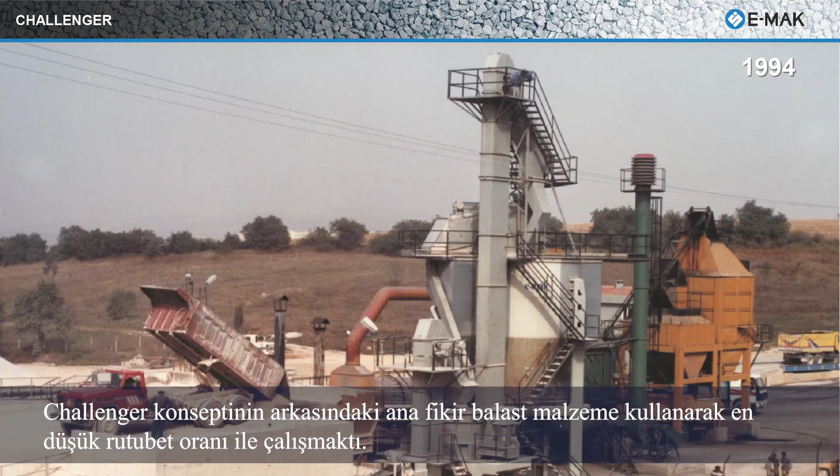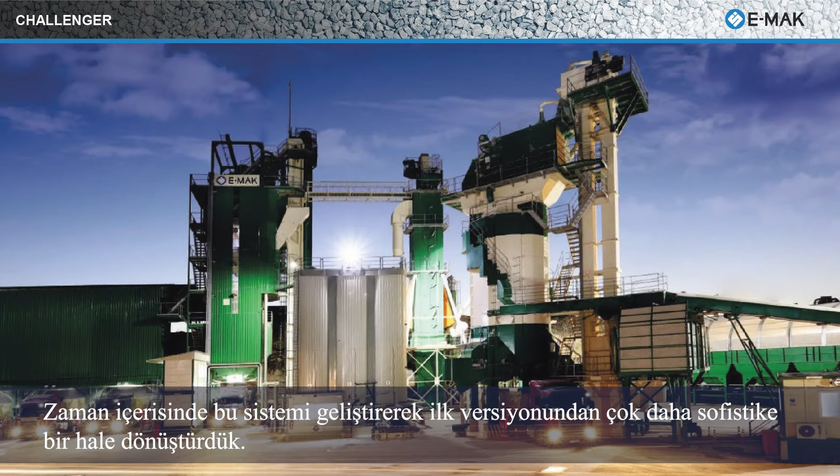I'll give you an example from 1994: a system we called Challenger. The idea was to work with ballast aggregate with very low moisture content, crushing, sieving, stockpiling and feeding the aggregate to the asphalt plant in a totally closed environment. That gave us a great reduction in energy consumption, CO2 emissions, and dust emissions. Over time we developed this system into something much more sophisticated, and it was always integrated into asphalt plants to produce asphalt.

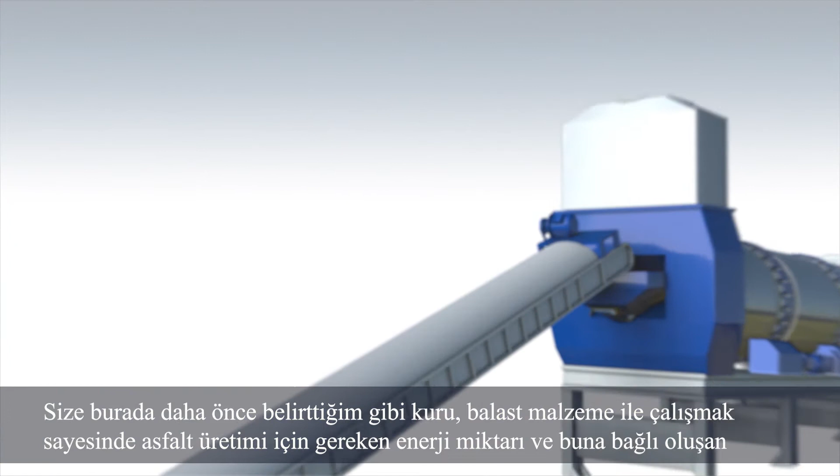I would like to tell you a little bit more about how it works. As I said, the ballast aggregate with lowest moisture is used in our asphalt production, halving the energy consumption, therefore the CO2 emissions. So it was a very successful project for energy reduction. And in 2008, we've been invited to an E&E Congress in Copenhagen, where we made a presentation about Challenger.

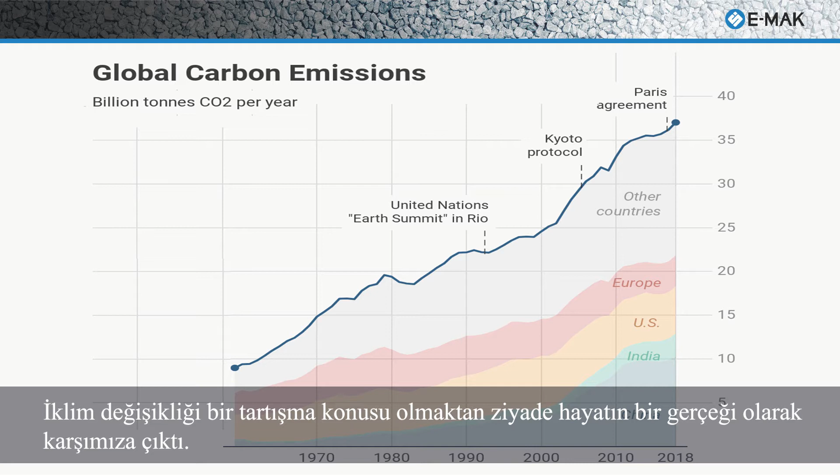Since then, time passed, and in the last 10 years, our lives have changed drastically. The word climate change has become a fact rather than a subject of debate. And the word sustainability has become a must rather than an option or a choice. So we, as equipment producers, we had to focus on doing something about it.

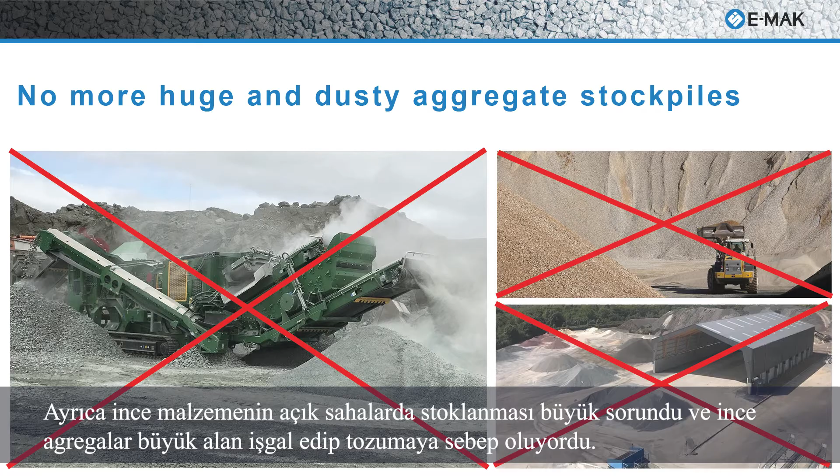So this time we focused our attention to the quarries. We tried to think what we don't want in the quarries. Secondary crushing, after the secondary crushing, the dust that takes place was something that we didn't want. Also, we didn't want to store fine aggregates in our systems. So no more huge and dusty aggregate stockpiles in our work sites. We wanted to eliminate that.

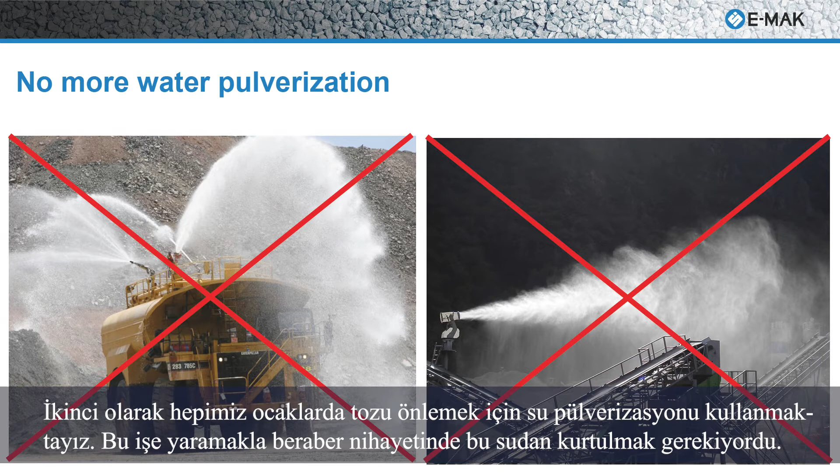And secondly, we all use water pulverization in our quarries, but then we thought, okay, water pulverization may reduce dust emissions for a while, but somebody has to get rid of this water. Let's say we are producing asphalt. This water in it, we have to pay a lot of money, a lot of energy to get rid of it. Then more energy means more CO2 emissions. So we had to get rid of the water pulverization also.

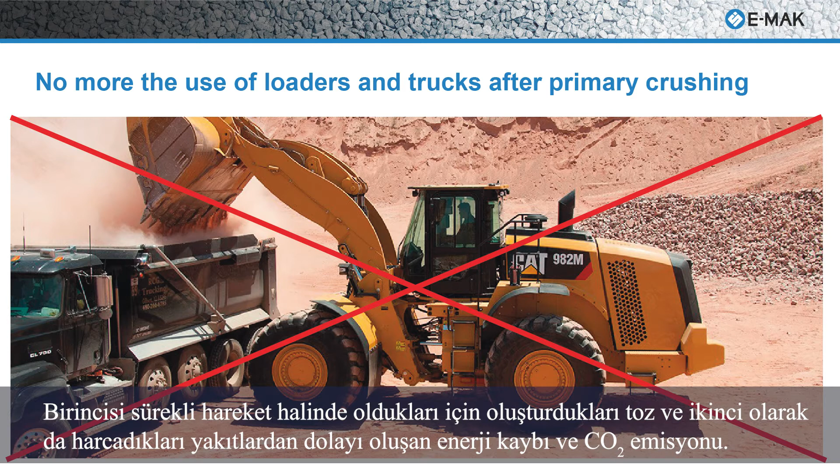And the third thing we didn't want in our quarries was to use the loaders and trucks in the quarries, because of two reasons. The first reason is they move around, they create a lot of dust. And the second reason is they create a lot of CO2. They spend a lot of energy. So we want to get rid of them too.

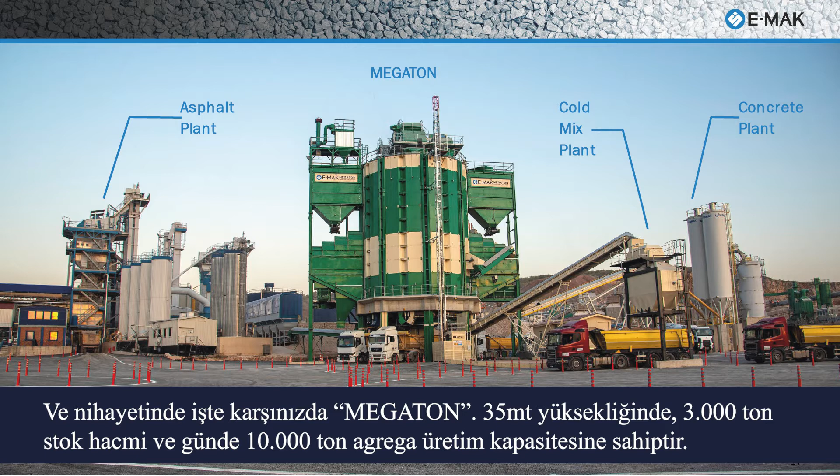So here it is, Megaton. Megaton is an aggregate factory, about 35 meters high, can store up to 3,000 tons of aggregate and 10,000 tons of aggregate per day production capacity. It is directly connected with asphalt plant, concrete plant, and cold mix plant. Again, we are working with ballast, clean, and lowest moisture aggregate, therefore halving the CO2 and dust emissions.

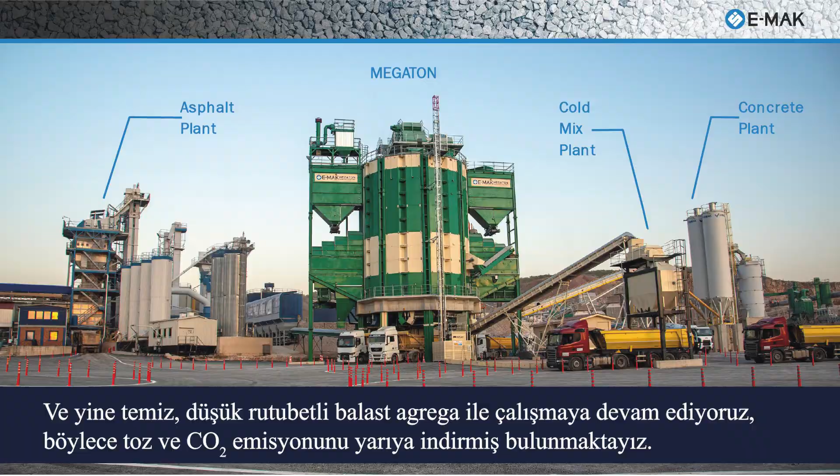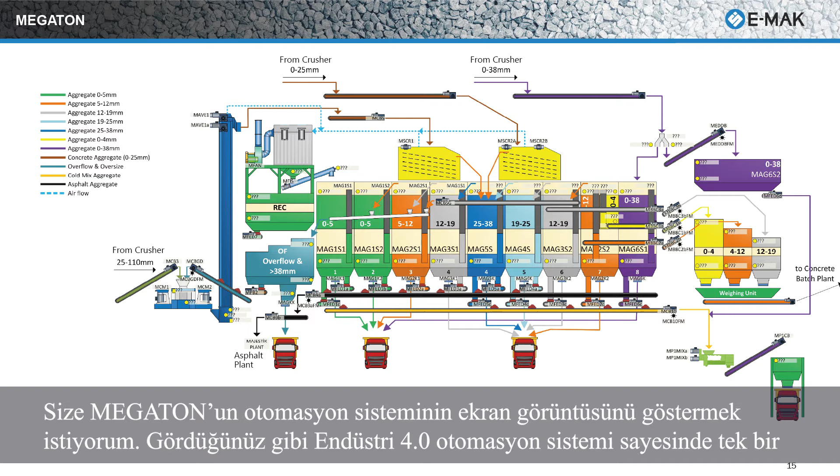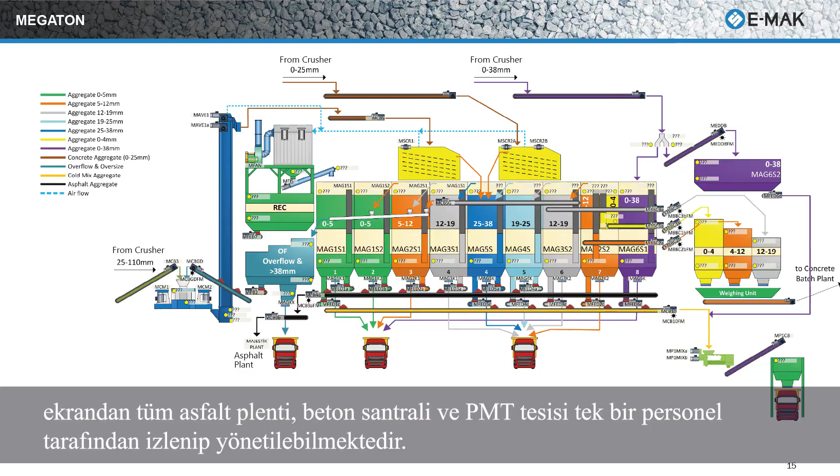I will show you a picture of the control unit of the Megaton. As you see, all the aggregate operations, all the material that is produced, whether it's with an asphalt plant, a concrete plant, or cold mix plant, can be seen, monitored and controlled from one screen, thanks to our Industry 4.0 automation system, and can be controlled with only one personnel. After this, I will show you a very short film to show you how Megaton actually works.

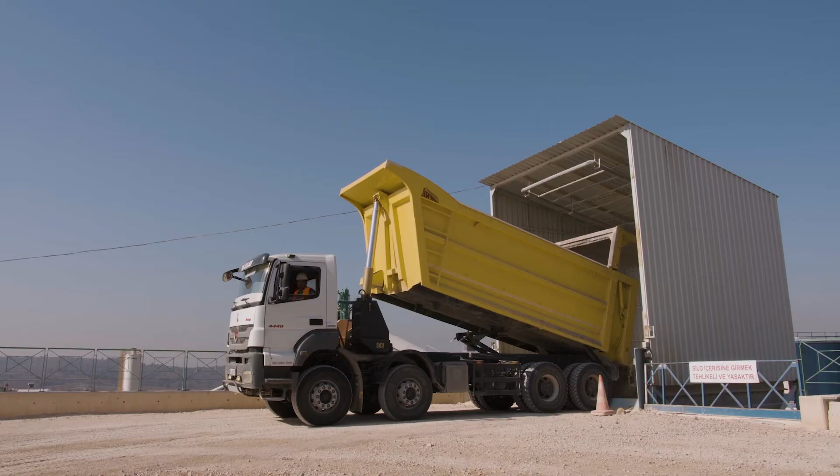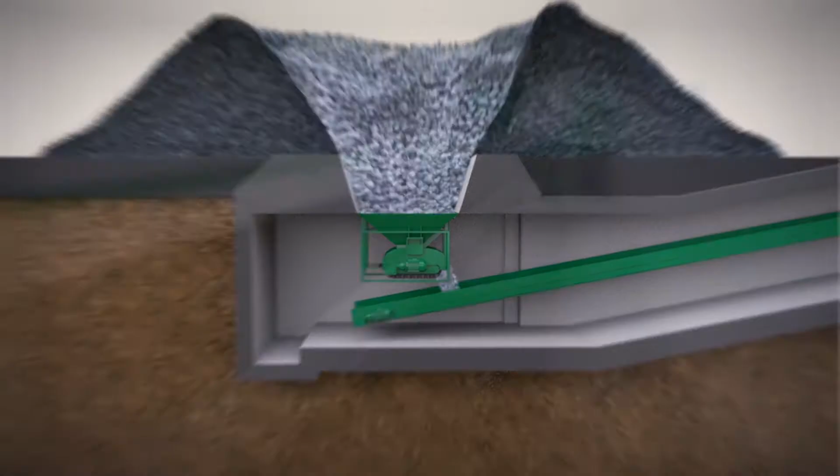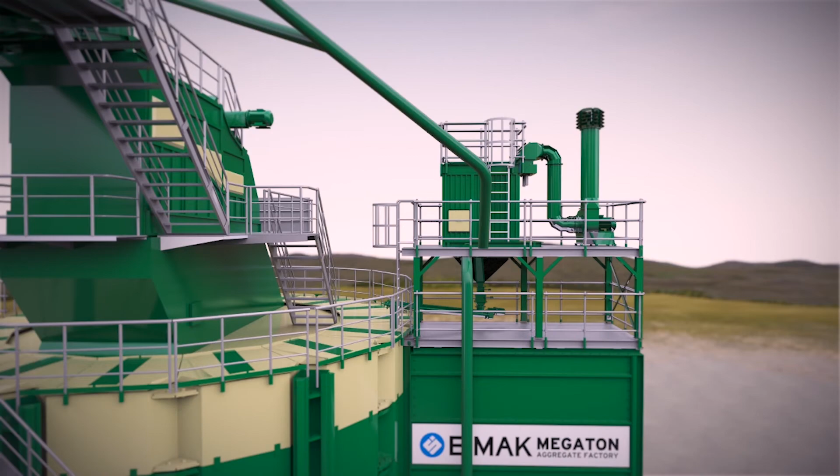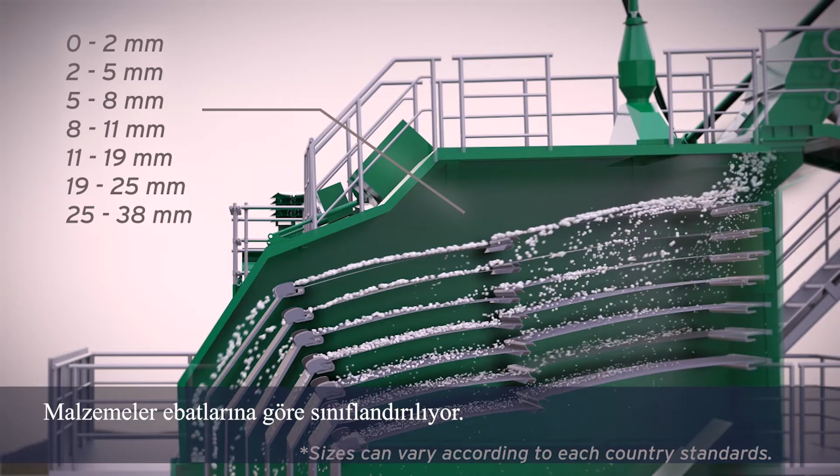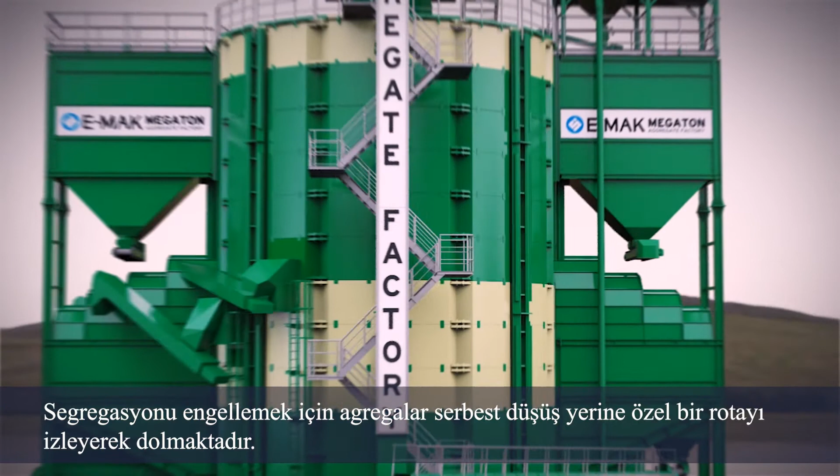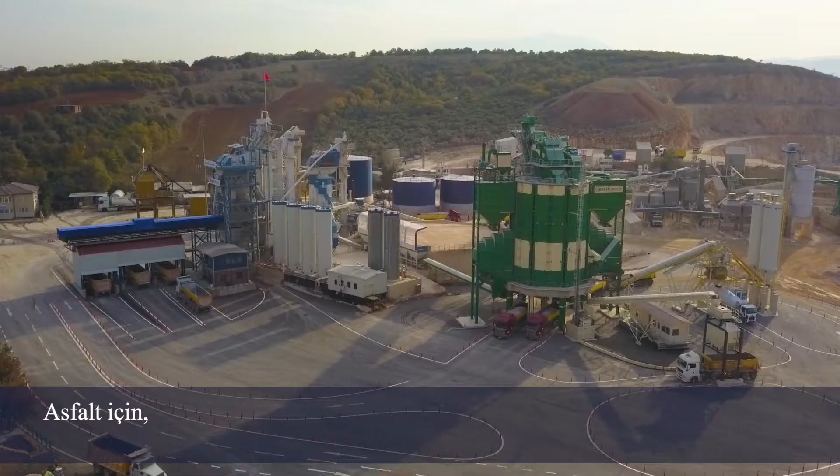And we can use our aggregate for any purpose, for cold mix, for concrete, for asphalt. This is a quarry working, producing aggregate, asphalt, cold mix, concrete simultaneously, no dust, less CO2.

Ten minutes is such a short time for me to explain all the features and answer all the questions about this new aggregate preparation system. But we'll be happy to answer your questions at our stand here, and we will be even more happy to welcome you at our work sites to see it working in the real conditions.

We will be very happy to have you. And at the end of this presentation, if there will be any applauding, please let it be for my father, who's the inventor and designer of this project. Thank you very much, ladies and gentlemen. Thank you for your attention.